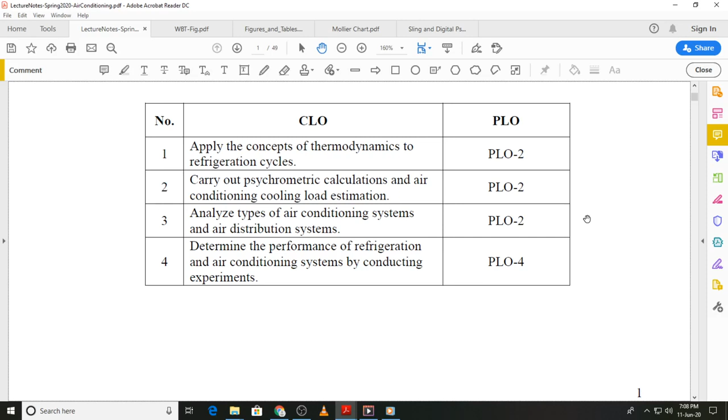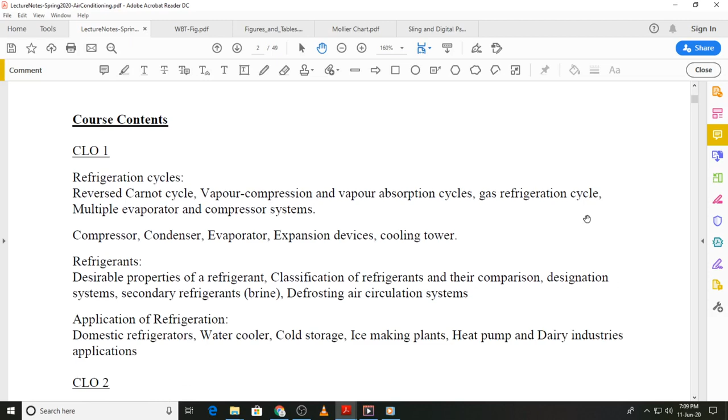The CLOs or topics are also provided to you separately for convenience, and if we look at the first topic in CLO2, that is psychrometry, and that is what we are going to start with. Before we move on to that, when we study air conditioning, basic thermodynamics concepts will be required. In addition, at some point we will also make use of your knowledge of heat transfer and fluid mechanics.

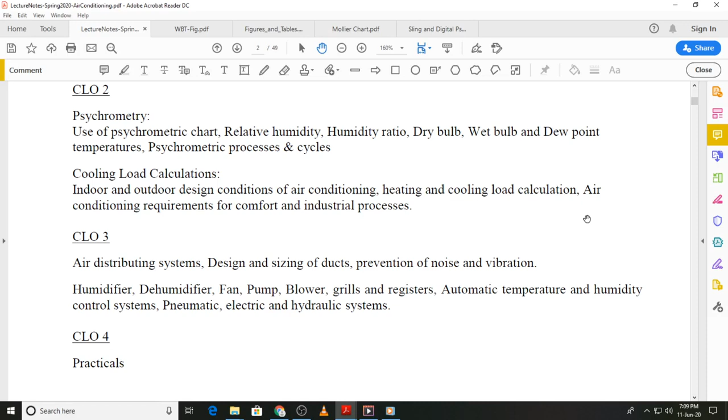So now let's move on and again remind ourselves how we can differentiate between refrigeration and air conditioning. Refrigeration involves removal of heat from a region which is at a relatively lower temperature, and then rejecting that heat in a region which is at a higher temperature. To achieve that and satisfy the laws of thermodynamics, we need a net power input into the system.

Air conditioning, on the other hand, does not restrict itself to cooling only. Depending on your requirement, air conditioning could be providing heating, for example during the winter season. In addition to the temperature, there are other factors which are also accounted for in air conditioning, for example the relative humidity, the velocity of motion of air within the conditioned space, radiant energy levels, the amount of contamination that is tolerable, and even how much noise attenuation is required according to your environment.

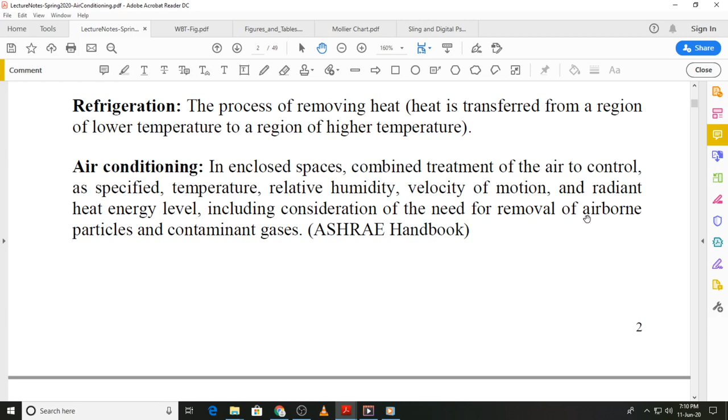So now we move on to the first topic, that is psychrometry. Psychrometry is the study of the thermodynamic properties of moist air. Moist air is simply air in which water vapor is present, and we can consider the moist air to be a binary mixture, dry air and water vapor.

For the typical conditions of air conditioning that we come across, each of these components can be considered to behave as an ideal gas, and the justification for that is that the dry air behaves like a perfect gas because its temperature is high relative to its saturation temperature, and for water vapor we can assume it to behave like an ideal gas because its pressure is low relative to its saturation pressure.

Once we assume that ideal gas behavior is applicable to these constituents, we can apply the relevant mathematical equations that are already known to us to find out or estimate various properties of the moist air.

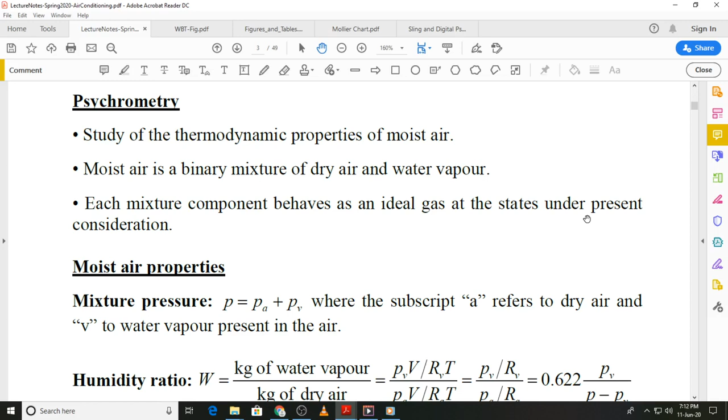The typical properties that we will come across when we study air conditioning are, starting with the mixture pressure. We are very well aware of this basic equation, that the total pressure of a mixture of gases is the sum of the partial pressure of those constituent gases. Because we have a binary mixture, the total pressure is the sum of the partial pressure of air and the partial pressure of water vapor in that air. We are using the subscripts A and V to designate the two constituents, air and water.

The humidity ratio is defined as the mass of water vapor per unit mass of dry air, and we are using the symbol capital W to designate that. In the SI system it will have units of kilogram per kilogram dry air, and when we write it as a numerical value, kilogram of dry air is shortened to kgda.

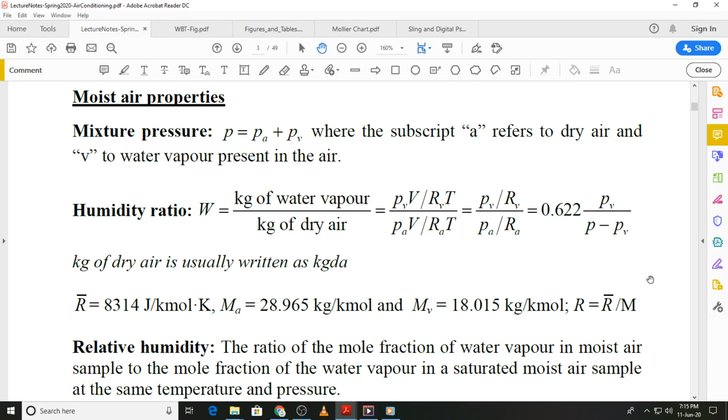Relative humidity. I'll just read off the definition first and then try to explain it. It is the ratio of the mole fraction of water vapor in a moist air sample to the mole fraction of water vapor in a saturated moist air sample at the same temperature and pressure.

If you have a sample of moist air, and if you add water vapor to that sample, the partial pressure of water vapor in that sample will increase. You can keep adding water vapor into the air sample, but you will ultimately reach a point where the air will not be able to take up any more water vapor, and we will say that the air has become saturated. So if we differentiate between the two states, there will be a maximum possible vapor pressure at the saturation state at a given temperature and total pressure.

Again we can use the ideal gas equation, PV equals number of moles into RT, where R is the universal gas constant. So the number of moles will be PV upon RT, and if we take the ratio of the number of moles when the moist air sample is not saturated divided by the number of moles when the moist air sample is saturated, the universal gas constant, the volume and the temperatures will cancel out because they are the same, and only the partial pressures will be left, and that ratio will give us the relative humidity.

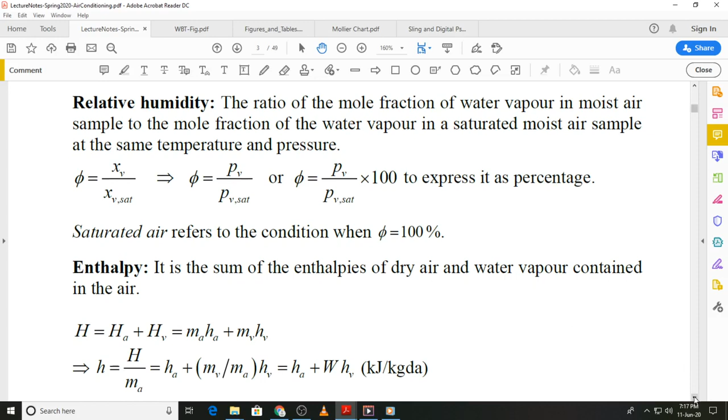The enthalpy of the moist air sample will be the sum of the enthalpies of dry air and water vapor contained in the air. The total enthalpy, designated by capital H, is the sum of the enthalpies of air and water vapor.

If I want to use specific enthalpy, I can find the enthalpy as a product of the mass times the specific enthalpy, and we can do that for air as well as water vapor. The resultant equation is capital H equals MA times HA plus MV times HV.

Now if I divide the right hand side and the left hand side throughout by MA, I get the specific enthalpy of the moist air, which is energy per unit mass of dry air. On the right hand side, MA cancels out in the first term, giving us HA, and in the second term we get the ratio MV by MA, that is mass of water vapor divided by mass of dry air, which from our previous definition is the humidity ratio. We can replace MV by MA with the humidity ratio W, and as I said, it will have units in the SI system of kilojoule per kilogram dry air.

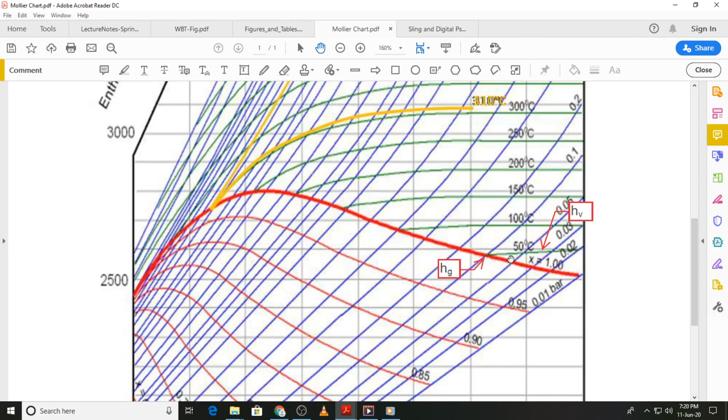If you look at the Mollier chart, I've shown you two points: one lies on the saturated vapor line and the other is in the superheated region. If our actual state is in the superheated region, we can see that at constant temperature, the value of enthalpy is almost the same in the superheated region at this point and at the saturated vapor line, because of the almost flat constant temperature line. So that is a justifiable assumption, and it helps us find the value of Hg easily from property tables.

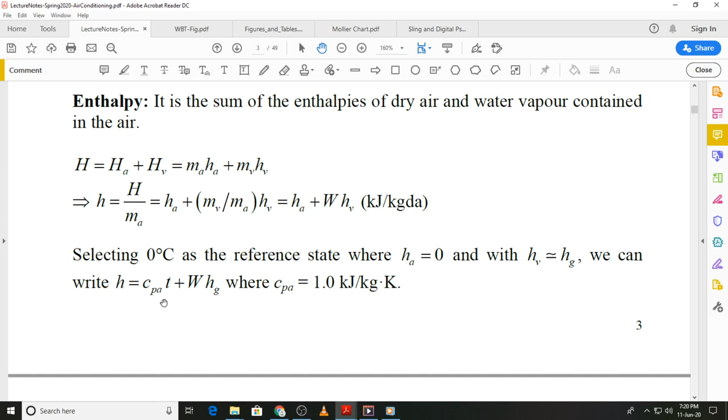And once we have that expression, we can simply find out the specific enthalpy of the moist air sample: CpaT plus W times Hg. Specific volume of the moist air, again straightforward application of the ideal gas equation for both dry air and for water vapor.

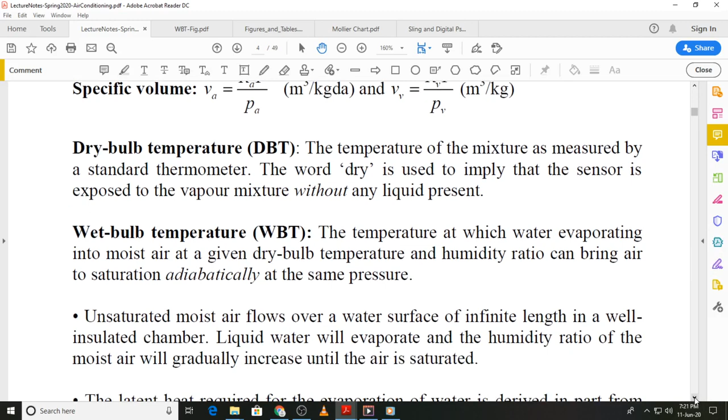The next thing we will look at are temperatures, and when we study psychrometry, we will not work with one temperature, but we will work with three temperatures, and we should be able to differentiate between these three. The first of these is known as the dry bulb temperature, and that is the temperature you will measure using an ordinary thermometer, that is the air temperature, whether a mercury in glass or liquid in glass thermometer, a thermocouple, or some other temperature measuring device. We use the word dry assuming the sensor of the thermometer is almost dry without any liquid present around it, and that is again justifiable.

The wet bulb temperature, I will first read out the definition and then we'll try to conceptualize it. It is the temperature at which water evaporating into moist air at a given dry bulb temperature and humidity ratio can bring it to saturation adiabatically at the same pressure.

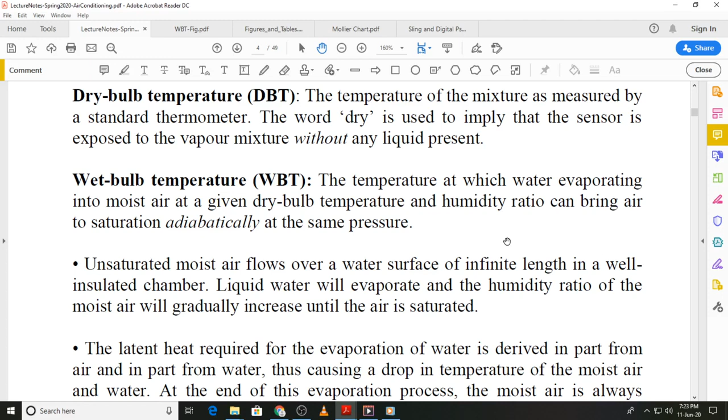What is implied is that we have a moist air sample which is not saturated, and that sample is brought into contact with water, and water evaporates into the air stream, eventually leading to a point where the air becomes saturated, done such that the entire process is adiabatic. What we can think of is a large chamber insulated or isolated from the surroundings, where unsaturated moist air enters and flows over water contained in that chamber. As the air flows in that chamber, liquid water which evaporates into the air stream will gradually increase the humidity ratio of the moist air.

Now, because the chamber is isolated from the surroundings and we are evaporating water, there is a need for providing the latent heat of vaporization. And because it cannot come from outside, that heat of vaporization is extracted partially from the air stream and partially from the water, which leads to a drop in the temperature of moist air and water.

This process will continue until we reach the point where the air becomes saturated and no further evaporation is possible. Then the temperature measured for air and water will be the same, and that is known as the wet bulb temperature. To maintain steady state conditions, we will also ensure we are providing water to the chamber at a rate equal to the rate at which it evaporates into the air stream, and at the same temperature.

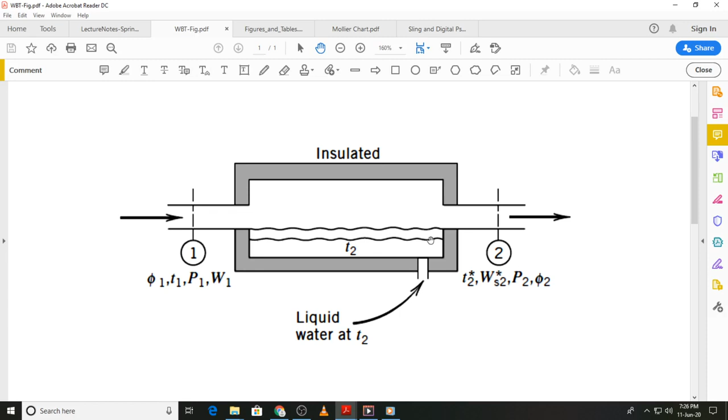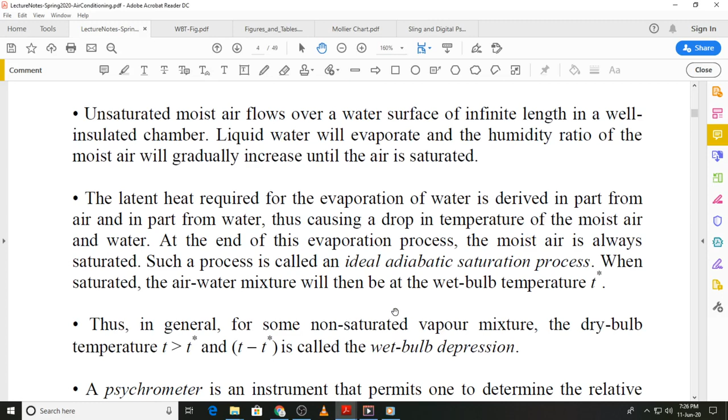The temperature difference between the dry bulb temperature and the wet bulb temperature is known as the wet bulb depression. From a knowledge of these two temperatures, it is possible to estimate the humidity ratio or relative humidity of the air sample you are looking at. And that is why this is an important parameter in air conditioning.

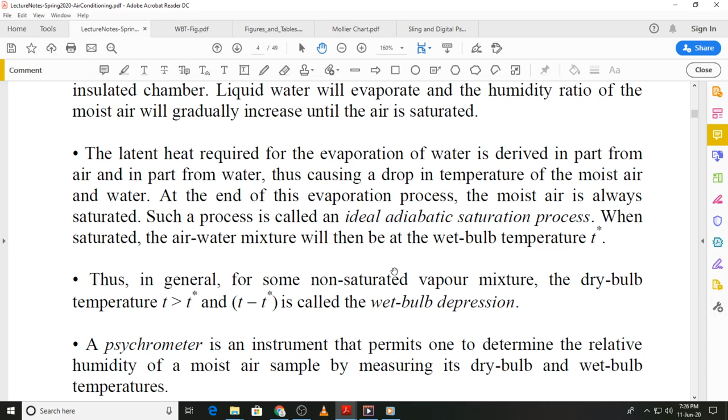Practically, if you want to measure this, you wouldn't have a huge instrument. It becomes impractical to have an infinitely long or very large size instrument to measure the wet bulb temperature. But there are instruments using which we can find out the wet bulb temperature, and that instrument is known as a psychrometer.

Before that, let me go to the third temperature, known as the dew point temperature. If you have a moist air sample and want to keep the pressure and humidity ratio unchanged, and still saturate the air, what I can do is reduce the temperature of the air until the moisture in the air separates out as fog or dew. That temperature at which the moisture separates out from the air sample at constant pressure and humidity ratio is known as the dew point temperature.

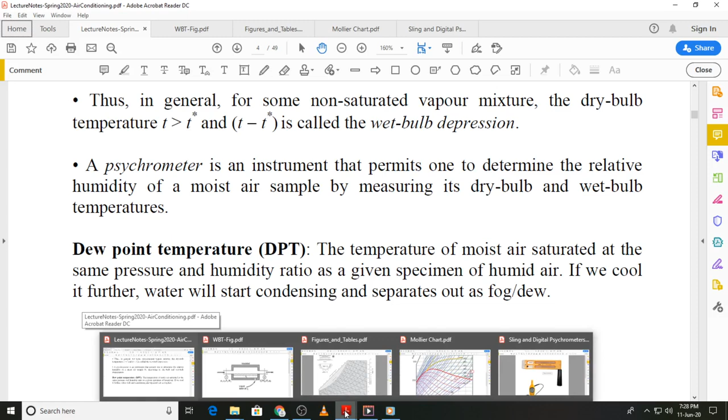I will now come to the psychrometer and show you the two instruments that are quite commonly used. One is a manual instrument shown here, known as the Sling Psychrometer. You can see it has two thermometers, one at the top whose bulb you can see, and it is exposed to the surrounding air.

This measures the dry bulb temperature. The temperature measured by the second thermometer is the wet bulb temperature, and you can see the bulb is not open to the air. It is covered with an absorbent material, and this is connected to a reservoir in which you fill water, which ensures that this thermometer has its bulb surrounded by a wetted absorbent material.

Holding this handle, you will rotate this upper casing, and after a while you will notice the difference in the two temperatures. The temperature measured by the upper thermometer will be the dry bulb temperature, which will be higher, and the one measured by the lower thermometer will be the wet bulb temperature, which will be lower. I will show you a video of how it is properly done.

The other is a digital psychrometer, which we are looking at here. It has a display on which you can see various properties like relative humidity, dry bulb temperature, wet bulb temperature, dew point temperature, etc. I will again show you a short video of this type of psychrometer.

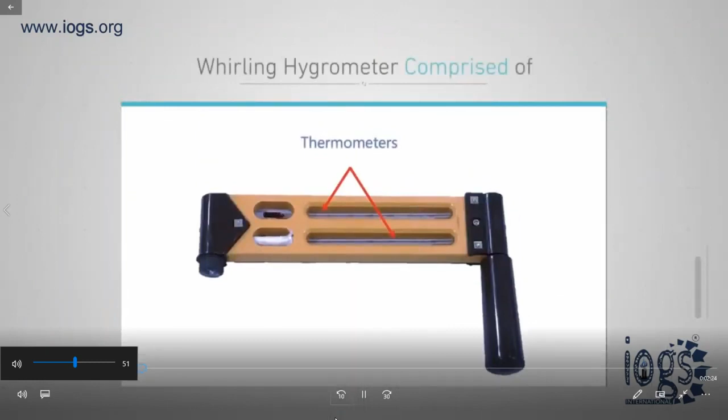The hygrometer is comprised of two thermometers, one of which has its bulb covered by a wick. The bulb covered by the wick is known as the wet bulb, and the uncovered bulb is called the dry bulb. The instrument also has a reservoir.

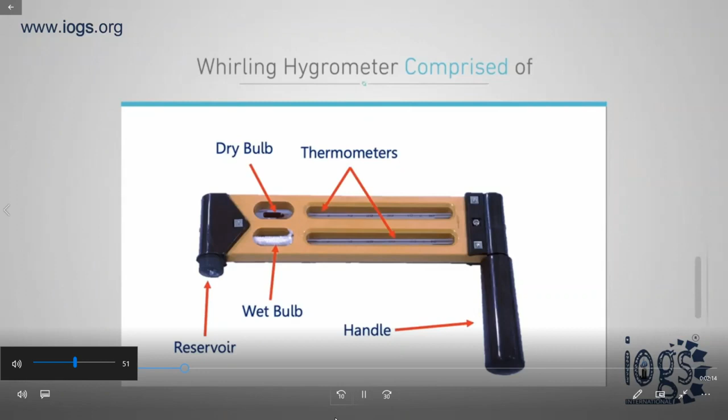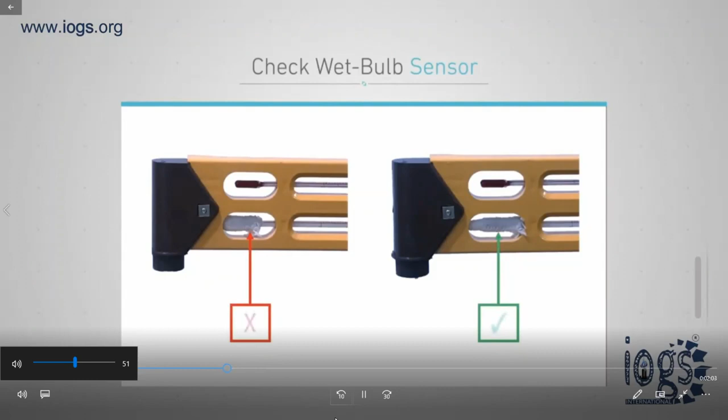Before starting to use the hygrometer, a bit of preparation and precautions are needed. Check that the wet bulb sensor is covered entirely by the wick. Fill the reservoir and saturate the wick of the wet bulb entirely with water. Several minutes may be needed for total saturation of the wick. Avoid touching the wick, because doing so may leave oil or dirt behind. Keep the dry bulb entirely dry. Avoid whirling the hygrometer in direct sunlight or near a heat source.

The correct technique for using a hygrometer is to face the wind and hold the handle well away from the body. Whirl the hygrometer rapidly, and after 30 seconds stop the motion and quickly read the wet bulb temperature. Go back to whirling the hygrometer for another 10 seconds and then read the wet bulb temperature for the second time.

Continue this system of whirling until three successive readings are the same or the wet bulb temperature becomes stable. When the temperature stabilizes, read and record first the wet bulb temperature, then read and record the dry bulb temperature.

While reading the thermometers, keep your body, hands, and any warmer or colder objects as far away as possible from the thermometer bulbs. After the wet and dry bulb temperature is established, a psychrometric table or psychrometric calculator is utilized to ascertain relative humidity and dew point of the air.

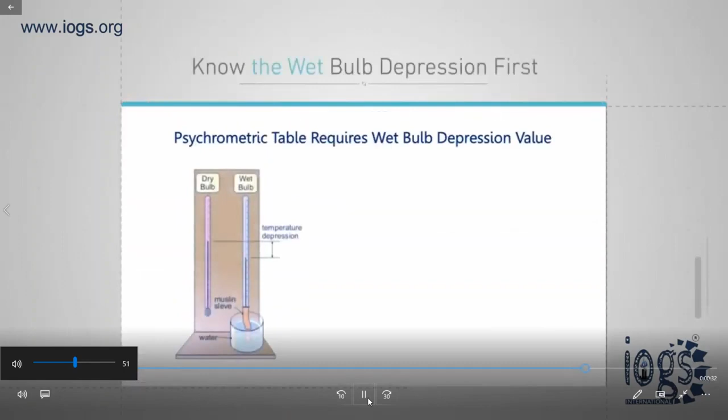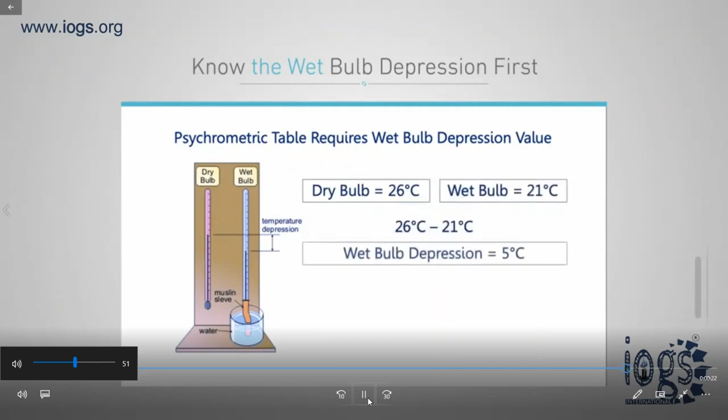The psychrometric table needs the wet bulb depression value, which is the difference between the dry and wet bulb temperatures. Both the dry bulb temperature and wet bulb depression are located on the vertical and horizontal axes, respectively, of the psychrometric tables. The point where the two temperatures cross indicates the relative humidity or dew point.

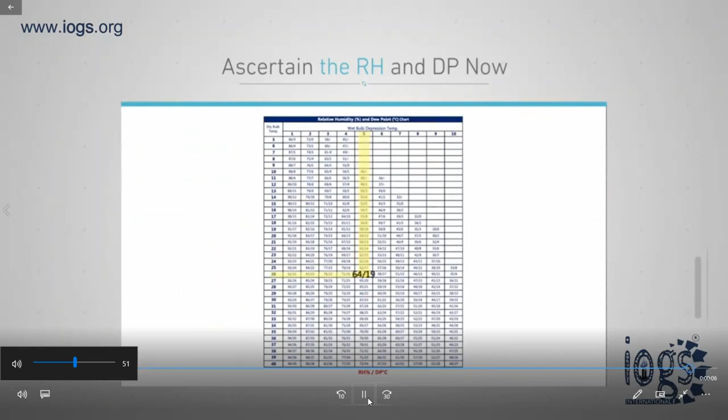Next, we will look at the working of a digital psychrometer.

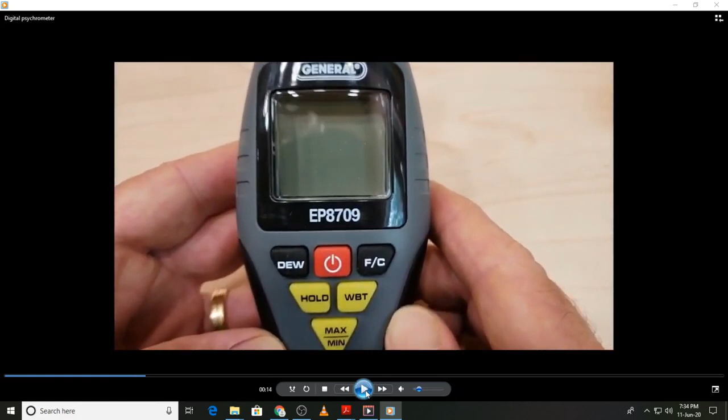That is the display of the psychrometer, and there are a number of buttons which you can see in the front. This is the on-off button. F/C lets you toggle between degree Fahrenheit and degree Celsius.

The wet bulb temperature is WBT, and DEW is the dew point temperature. Hold, if you are measuring changing values and you want to hold the value at a particular point, you can press this button. If you take several readings and you want to find out the maximum and minimum, that feature is also available.

When you turn on the psychrometer, typically you will get the relative humidity and the dry bulb temperature, and then you can also move on to other temperature readings.

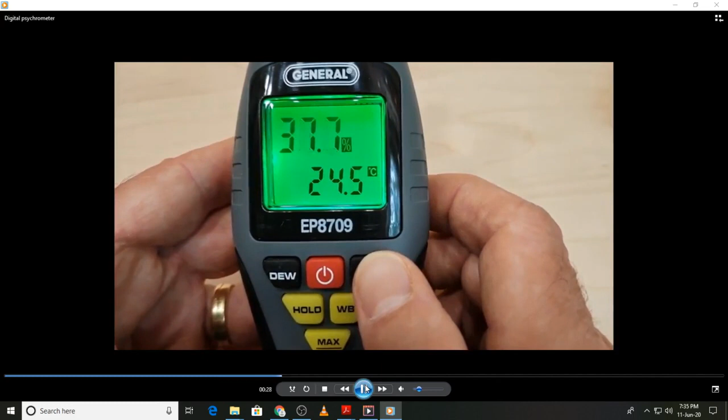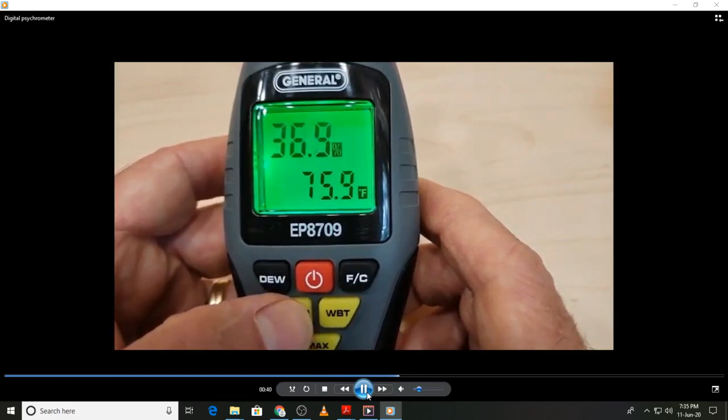And this is quite a handy instrument, used to measure the desired values in the industry.

Once you have used it, you can close the sensor cap and store it in its casing.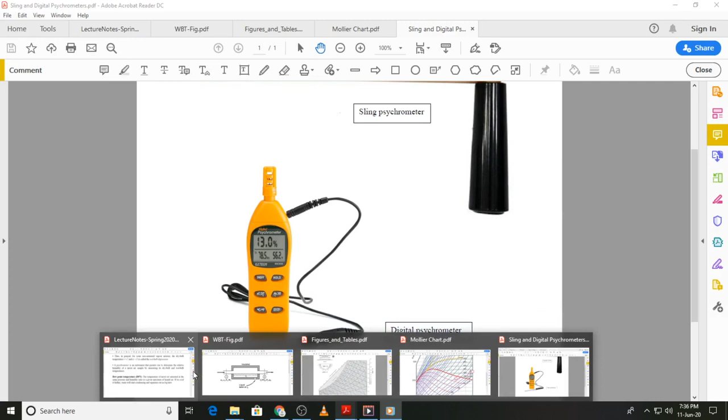So the properties, again, just to summarize: we had the total pressure, the humidity ratio, relative humidity, the dry bulb temperature, wet bulb temperature, dew point temperature, specific enthalpy of moist air, and specific volume, and we have the relevant mathematical equations to calculate these. But there is an alternate available to us, and that is a graphical representation of these properties, known as the Psychrometric Chart.

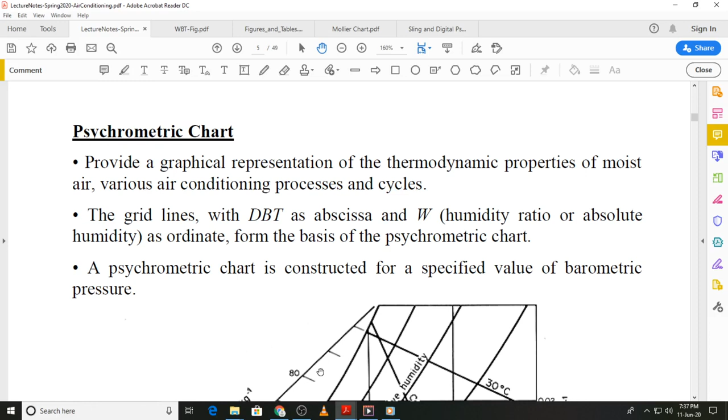It is quite a convenient tool for professionals in the HVAC industry, and we will first look at what information is there on a typical psychrometric chart.

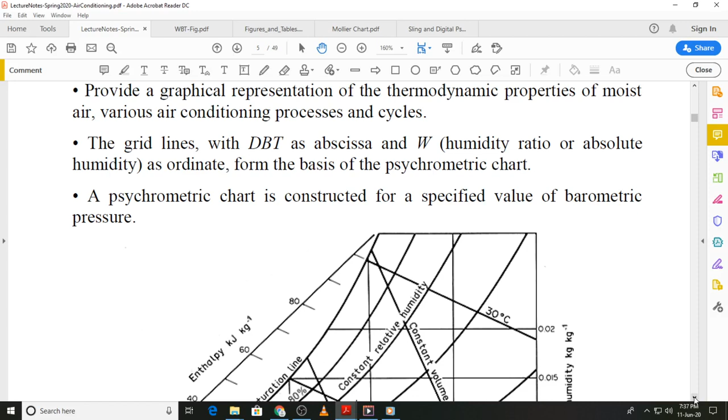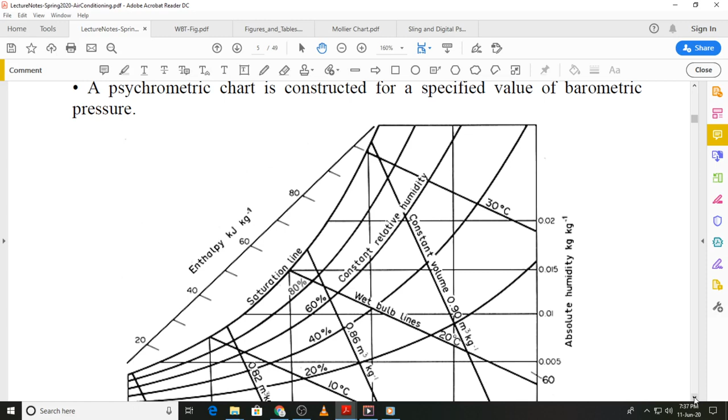First, you have to keep in mind that the psychrometric chart is constructed for a specified value of barometric pressure, that is, the atmospheric pressure. This means that if the barometric pressure changes, the values in the psychrometric chart will also change.

That is an important aspect of the state of moist air: it requires at least three independent properties to establish the state of moist air, one of them being pressure. Once that pressure is established, we can then choose any two other properties, and the state of that moist air will be shown on the psychrometric chart.

On the horizontal axis, you have the dry bulb temperature, and you have the humidity ratio on the vertical axis. Humidity ratio is also referred to as absolute humidity. And then there are some other curves and lines on this psychrometric chart.

For example, we have constant relative humidity lines, and you can see some constant relative humidity lines over here, starting with, let's say, 20%, then 40, 60, 80%. On the saturation line, by default, the relative humidity must be 100%. Similarly, on the horizontal axis, where the humidity ratio is 0, the relative humidity will be 0.

The constant specific volume lines are also shown, which will have units of meter cube per kilogram dry air. Constant wet bulb temperature lines are shown here, and you can also read the enthalpy at the state of interest using a scale where enthalpy is given in units of kilojoule per kilogram dry air.

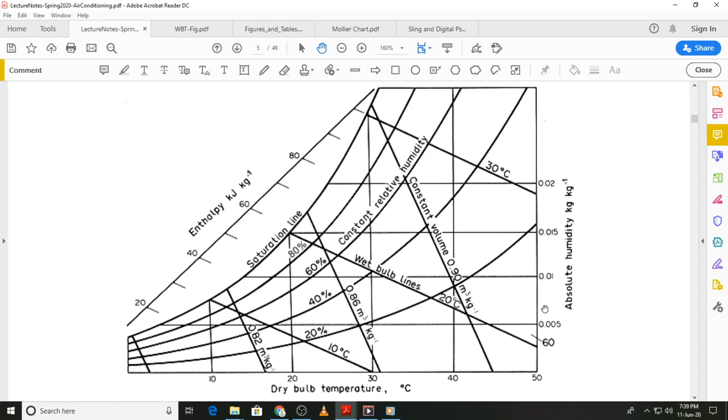ASHRAE Psychrometric Chart number 1 means there are other psychrometric charts produced by ASHRAE. In fact, in the SI system, there are 7 psychrometric charts produced by ASHRAE. Charts number 1 to 4 are for the normal, standard barometric pressure of 101.325 kilopascals, but for different temperature ranges.

Psychrometric chart number 1 is for the normal temperature range from 0 to 50 degrees C, and it is the most commonly used psychrometric chart in the HVAC industry.

The other 3 charts, 5, 6 and 7, are for different pressures. As I said, if you change the pressure, the property values change.

ASHRAE psychrometric charts number 5, 6 and 7 are for different pressures, specified in terms of height above sea level. 750 meters above sea level is chart number 5, 1500 meters is chart number 6, and 2250 meters is chart number 7. Charts 5, 6 and 7 are for the normal temperature range of 0 to 50 degrees C.

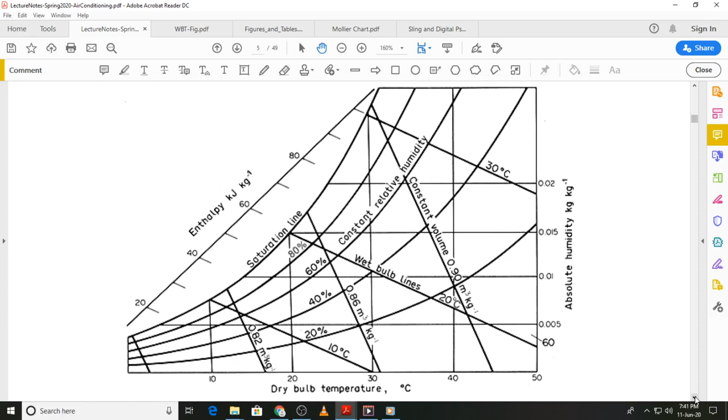I will now show you the psychrometric chart that we will be making use of, and you should be familiar with the use of this table. It is a more detailed table, but it has the same information. Of course, you can see the barometric pressure shown here.

First, let's look at the psychrometric chart here and try to identify any differences between this chart and the one we looked at earlier.

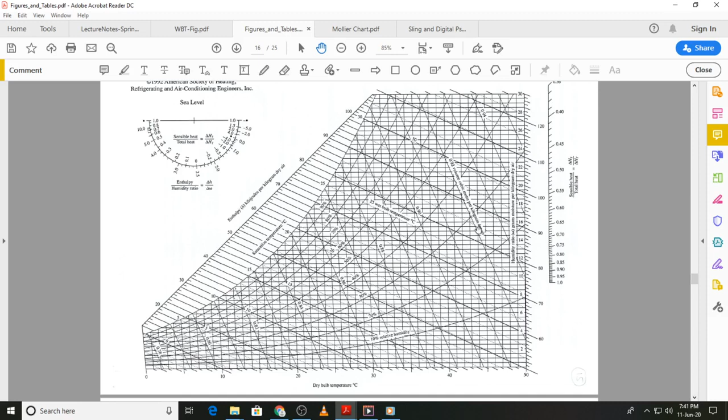There is one important difference to keep in mind: the units for the humidity ratio. In the ASHRAE psychrometric charts, the humidity ratio is given in grams per kilogram dry air, that is grams of water vapor per kilogram of dry air, not kilograms per kilogram dry air. So if you are given a humidity ratio value in kilogram per kilogram dry air, you must multiply it by 1000 to convert it to grams per kilogram dry air. Conversely, if you read a value from the chart in grams per kilogram dry air, divide it by 1000 to get kilograms per kilogram dry air.

Other than that, we have the usual properties we looked at: relative humidity, with constant relative humidity lines; the dotted lines are constant wet bulb temperature lines; then the constant specific volume lines, the constant specific enthalpy lines, and the scale from which you can read the enthalpy. So all these constant property lines are clearly identified on the psychrometric chart.

In addition, there is another tool available to us. If you look at the top left hand side, you can see a protractor with 2 scales, one inside, the other outside. The utility of this tool we will look at when we study psychrometric processes, and it is quite useful. So we will leave it for now and come back to this protractor when we study psychrometric processes.

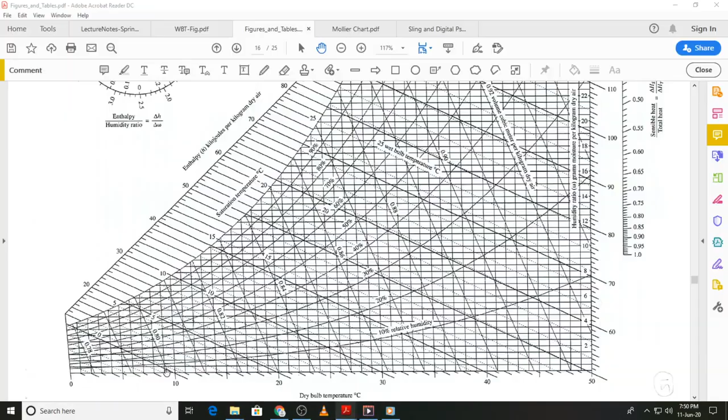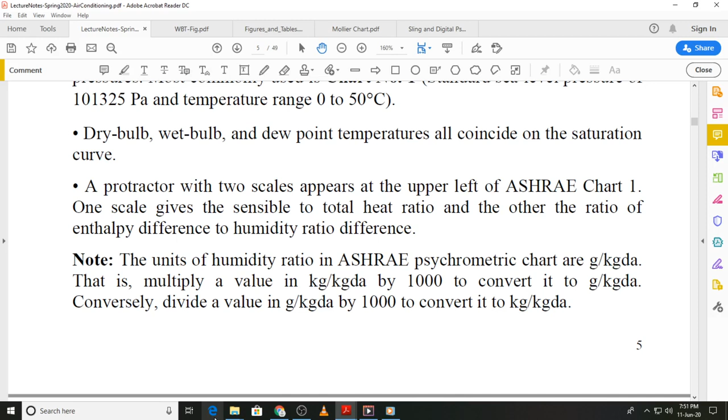So this is what I was just talking about, and I briefed you about that. We will continue with this in the next class by taking up some examples where we will use the mathematical results we obtained to find the various properties, and also use the psychrometric chart to verify those properties. I encourage you to get familiar with using the psychrometric chart yourself: print it out, mark a state, and find the unknown properties at that particular state. That's all for today, and we will continue with this in the next class.